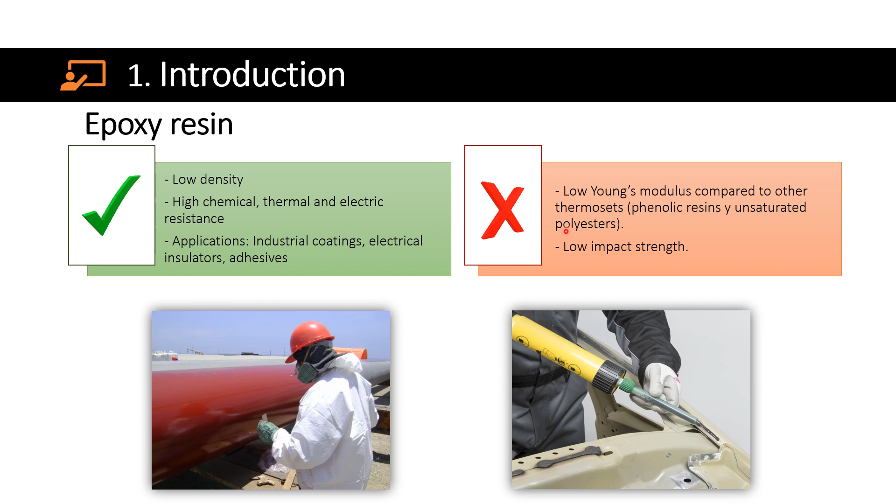Low-cost ceramics are deemed as promising fillers in the field of polymer composites. Submicronic iron oxide-based minerals have attracted the attention of the scientific and industrial sectors due to their intrinsic magnetic properties and characteristic gamma and X-ray attenuation. Among them, naturally occurring black beach sands, also known as ferrotitaniferous sands, composed primarily of ilmenite, raise special interest.

In South America, these sands are prevalent along the coastlines of various countries, and traditionally, these deposits have been mostly exploited with the purpose of obtaining titanium dioxide. However, the low titanium dioxide recovery rate is still insufficient to justify the mining process. In Ecuador, these sands have been localized primarily along its coast with an estimated commercial value of $24 per ton and have been conventionally used only as a cement clinker additive and agro-industrial fertilizer.

Recently, these sands have been employed as a low-cost precursor for the synthesis of iron-titanium oxide-based nanostructures and ferrous oxalates via soft chemistry approaches. However, applications of Ecuadorian ferrotitaniferous sands without chemical treatments have still not been reported in the literature.

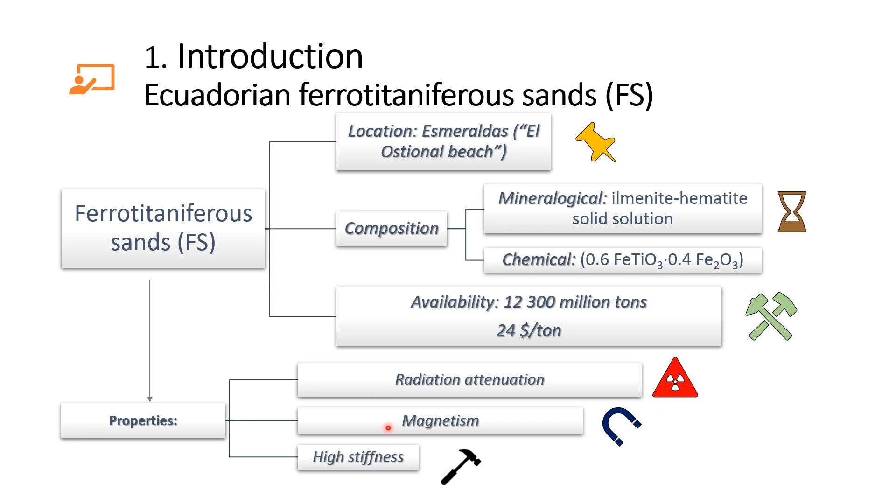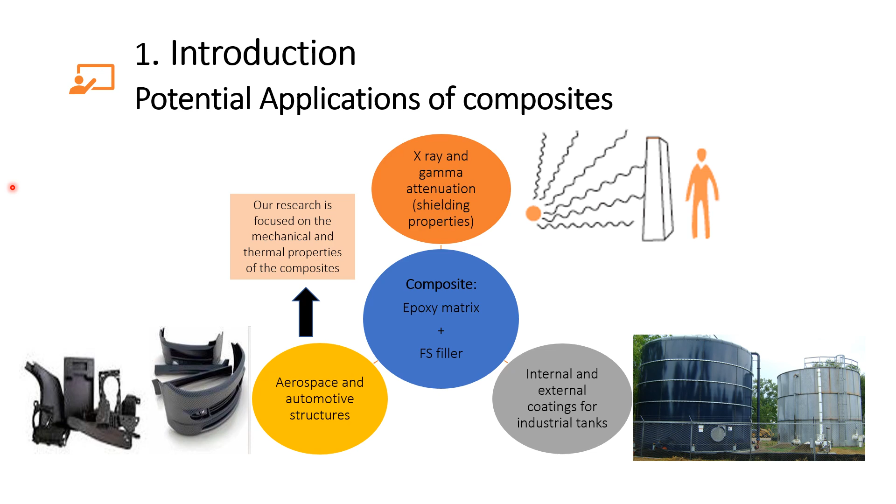However, up until now, the feasibility of reinforcing epoxy resin with ferrotitaniferous sands has not been considered, even though the filler's mechanical and magnetic properties can be imparted to the composites. Hence, this work is intended to evaluate the effect of ferrotitaniferous sands in reinforcing an epoxy resin through microindentation and dynamic mechanical analysis. This study is a framework for the exploration of the mechanical and thermal response of the as-prepared composites as a valuable step towards expanding the applications of the ferrotitaniferous sands in this research area.

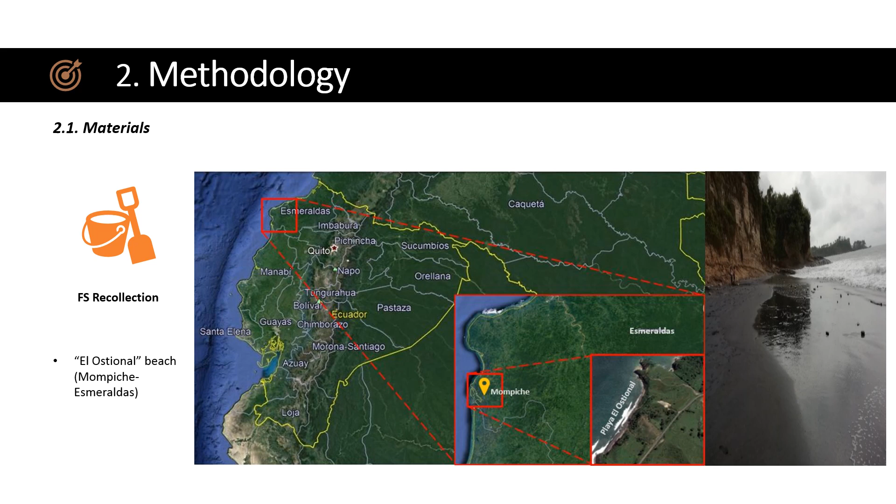For this work, Ecuadorian ferrotitaniferous sands were collected from the El Ostional Beach located in Mompiche, Esmeraldas. The collected samples were ball milled using the conditions determined in a previous study. The ferrotitaniferous particle size distribution was determined through dynamic light scattering. Through this analysis, an average size of 450 nanometers was determined.

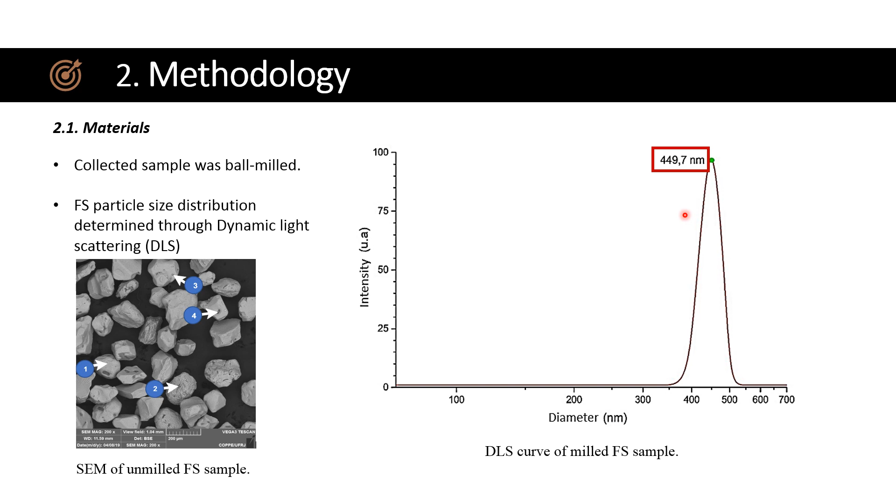The composites were obtained following the procedure described in the following schematic. In a determined amount of epoxy resin, ferrotitaniferous sands were added. The sand contents were 2, 4, and 6% in weight, respectively. The sands were dispersed by sonication in an ice bath. Afterwards, the curing agent was added to the as-prepared dispersion and manually stirred during 10 minutes. The composites were shaped by casting in acrylic molds. Finally, the upper specimen was polished to improve the surface quality.

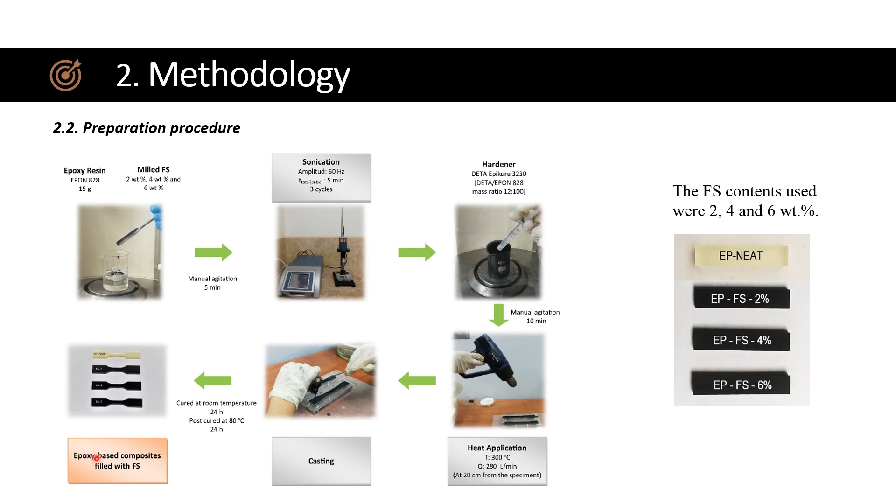The control sample and composite specimens were tested through microindentation using the conditions shown on the screen. Both the elastic modulus and hardness of these composites and sample were computed employing the Oliver-Pharr method. On the other hand, dynamic mechanical analysis was carried out to quantify the storage modulus, the loss modulus, the damping factor, and the glass transition temperature. These analyses were performed using the conditions shown on screen.

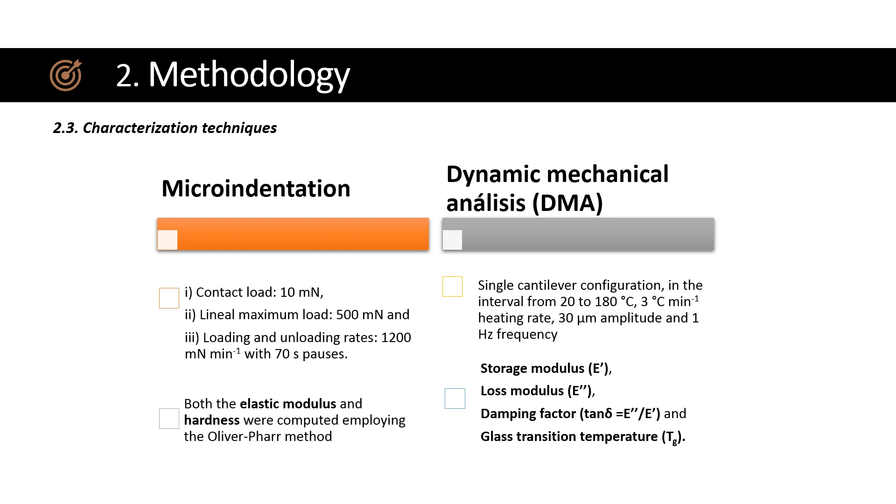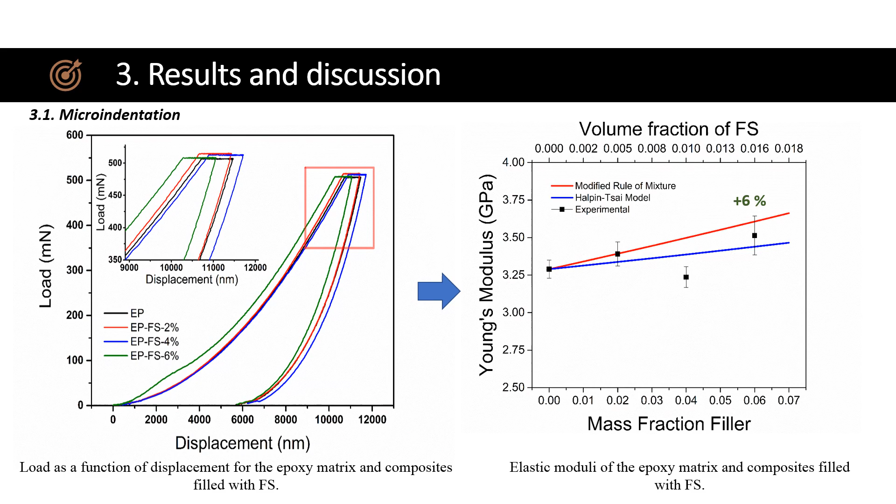Micromechanical models are used to predict the final characteristics obtained through a composite based on the properties of its constituents. The first micromechanical model used was the modified rule of mixture. This model considers a strengthening factor, which contemplates filler orientation and finite length and is best suited for particulate composites. The second model used was the Halpin-Tsai model. This model considers a shape fitting parameter, which takes shape and size of the filler into account.

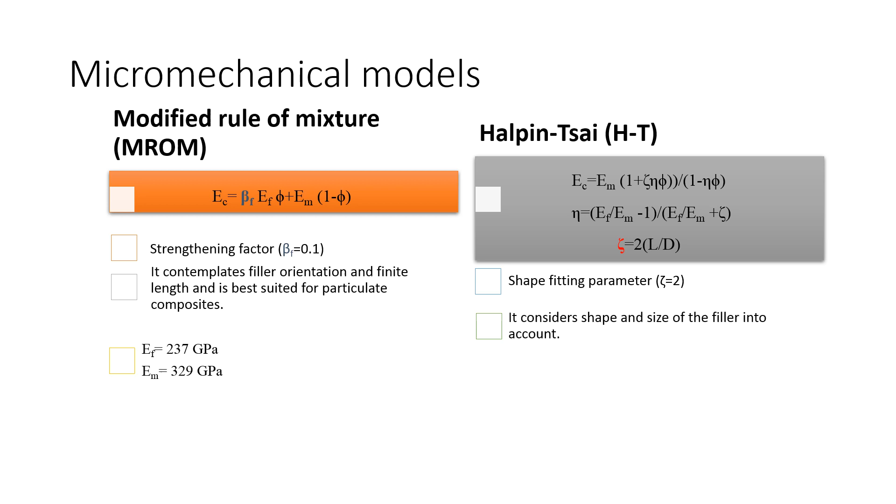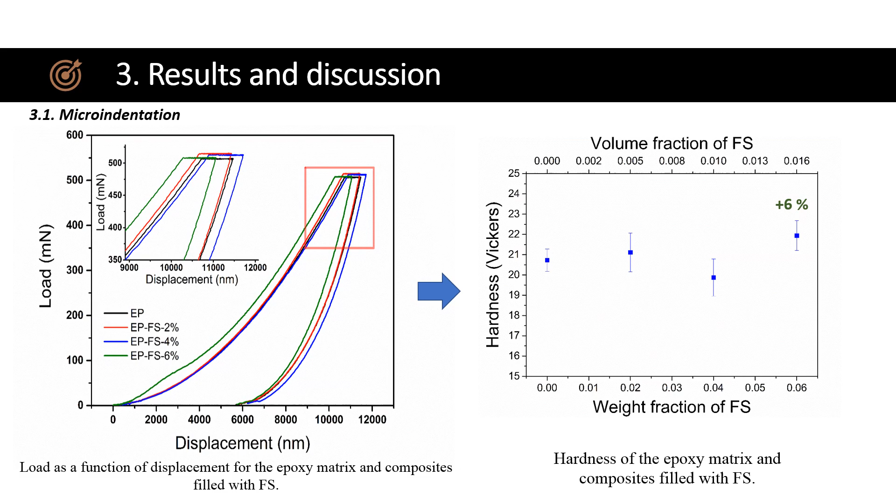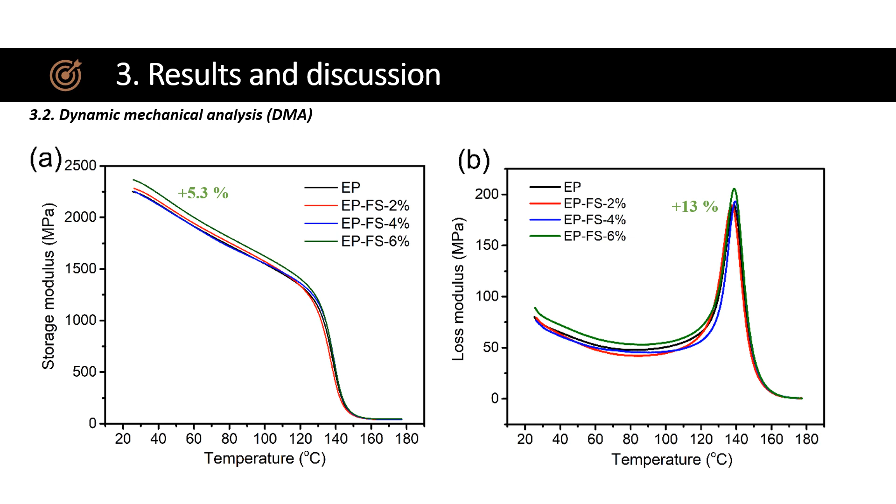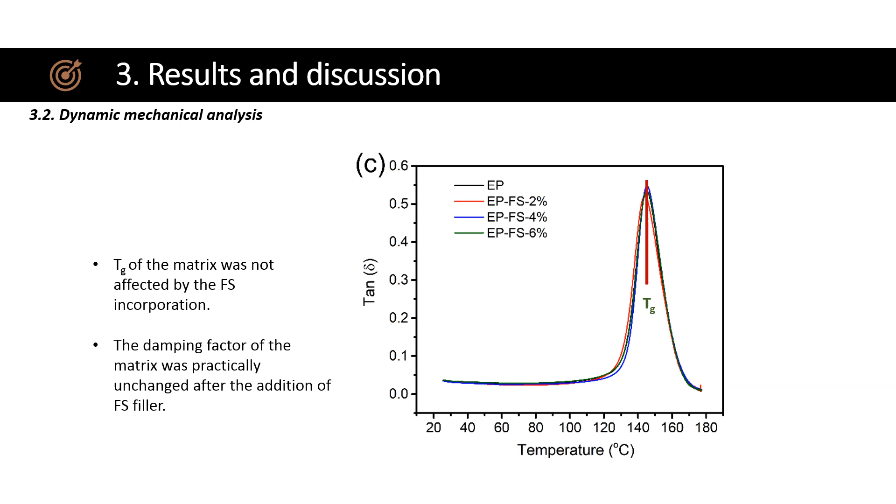Through the results that were obtained, the following final remarks can be stated. The optimum amount of ferrotitaniferous sands was 6%, and this was defined by microindentation since it allowed obtaining increases up to 6% in both Young's modulus and hardness. Both the modified rule of mixture and the Halpin-Tsai micromechanical models supported the experimental results through their predictions of the elastic modulus.

The composite with the highest amount of reinforcement also exhibited the highest increase in storage modulus at room temperature. Besides, the tan δ for all composites was unchanged, indicating that the vibration damping parameter was not affected by the incorporation of the ferrotitaniferous sands. Finally, these results paved the way towards broad applications of ferrotitaniferous sands as a low-cost raw filler. Higher filler loadings can be explored to determine the maximum amount of ferrotitaniferous sands to effectively reinforce the epoxy matrix.